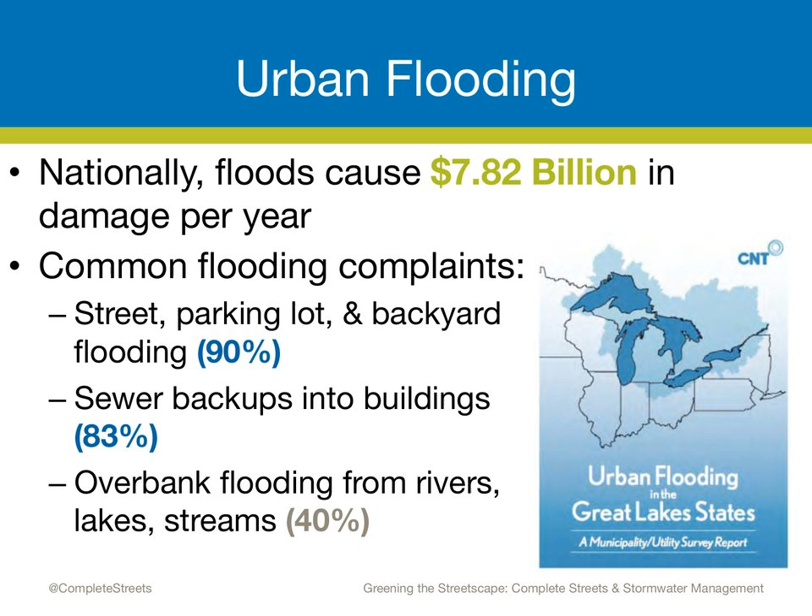What's even more alarming is that this problem is expected to worsen. For those of you that follow transportation, our national transportation funding, and the state of our national infrastructure, we know our infrastructure is aging. It's failing us, and rainfall is increasing as a result of climate change. So without innovative strategies to manage stormwater, we'll see increased damage from flooding in urban areas. And this isn't just damage to property and to our infrastructure. This is damage to life.

A little unknown fact about me is that in a previous job, I worked for a member of the King County Council who also chaired the King County flood control district, and a lot of what we worked on were urban flooding issues. And sadly, during that time, there was actually a woman in the city of Seattle who died due to flooding in her home that was a result of poor stormwater management within the city. And that was outside of the floodplain.

We have another survey from CNT, in Midlothian, Illinois, that found, again, most flood impacts happen outside the floodplain, where insurance coverage for flooding is not as comprehensive. For instance, you don't think of the city of Seattle as a floodplain. Our floodplains are north and south of the city, and yet we did have a lot of flooding. So who bears the weight of this burden? Those who cannot afford to move. Often cities also bear the burden as they are responsible for cleaning up the stormwater. We've had CSO, or combined sewer overflow, issues.

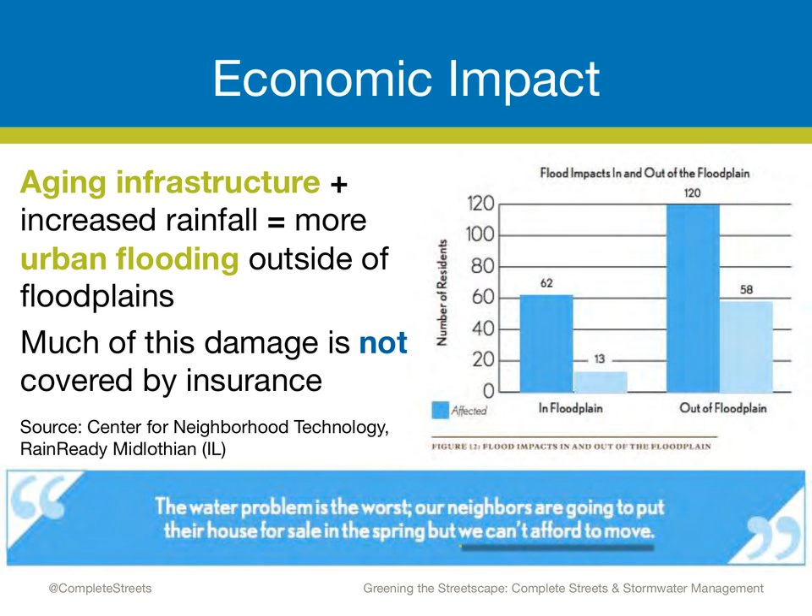So I think it's such a great nexus in hitting all those bottom lines we really look for at the coalition. So with that said, I want to start out by introducing Aaron Villere. Erin is a program associate with NACTO, that's the National Association of City Transportation Officials, and a National Complete Streets Steering Committee member. He is an associate with their Designing Cities initiative.

He works with cities to expand peer learning opportunities and promote best practices in multimodal street design. Erin has worked closely with cities on the development of two of the most recent additions to NACTO's library, the Transit Street Design Guide and what I just mentioned, the Urban Street Stormwater Guide. He has also had the chance to work with cities to advance innovative street designs that create better places for people walking, bicycling, and riding transit through NACTO's Transit Program Accelerator, the Digital Design Charrette Series, and the Cities for

Cycling Roadshow. There's a lot of alliteration in that, Erin. Erin has a master's degree in city planning from Boston University, where he studied the relationship between transit expansion projects and equity. So with that, I'm going to turn it over to Erin.

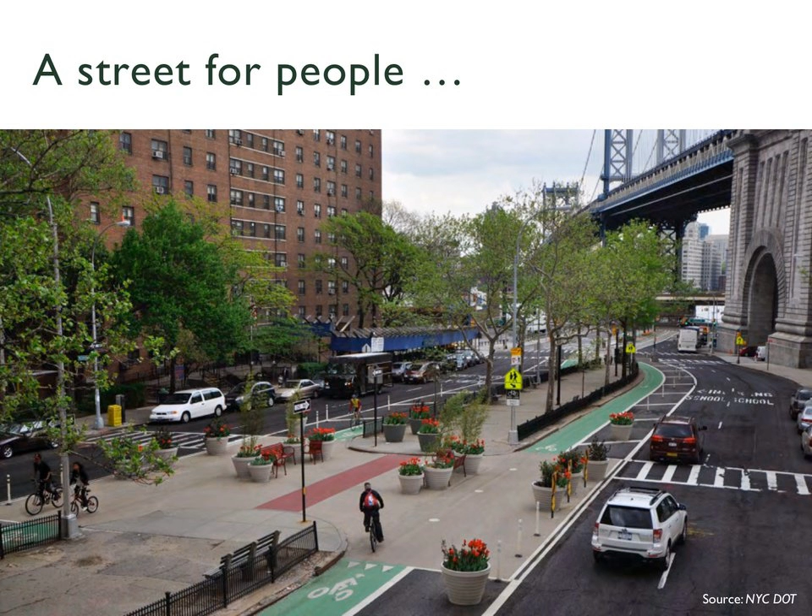However, leading cities have done tremendous work reclaiming and reorganizing these kinds of streets into more complete streets, and they're substantively making these places safer and more inviting for people to walk, bike, and enjoy as public space. However, the piece that's too often left out or thought about sort of in a silo is the environmental quality and ecological quality of large impervious surfaces, which are streets.

And so today we want to shift the conversation to how cities are taking the next step and thinking about ecology and resilience to climate change to get even better performance from one of their most important assets, which are streets. And cities can reallocate space from cars to people to get better mobility, but they can also repurpose impervious surface to protect and restore water resources and systems.

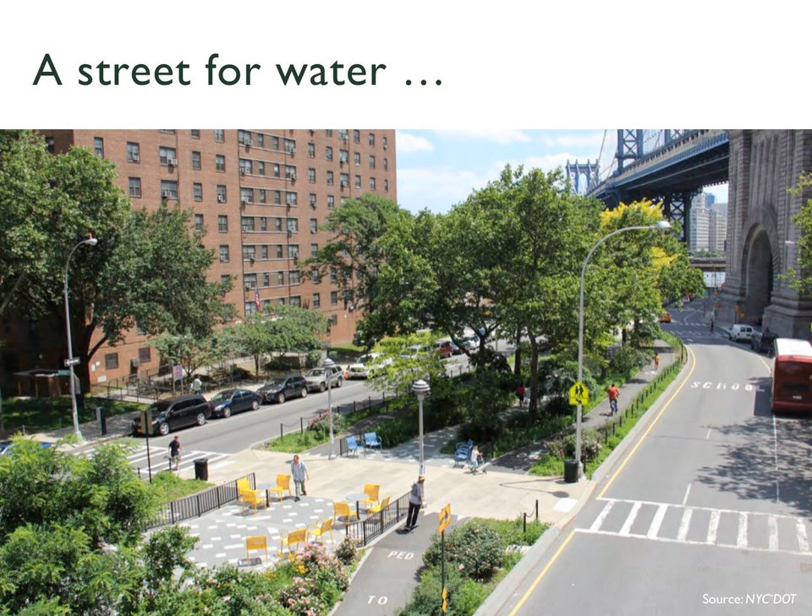And we know that a flooded street is not a complete street. When it rains, people biking and walking and using mobility devices are the first ones to lose access to the street and then the last to regain access. So this is a street that's not doing its job for mobility or for stormwater management.

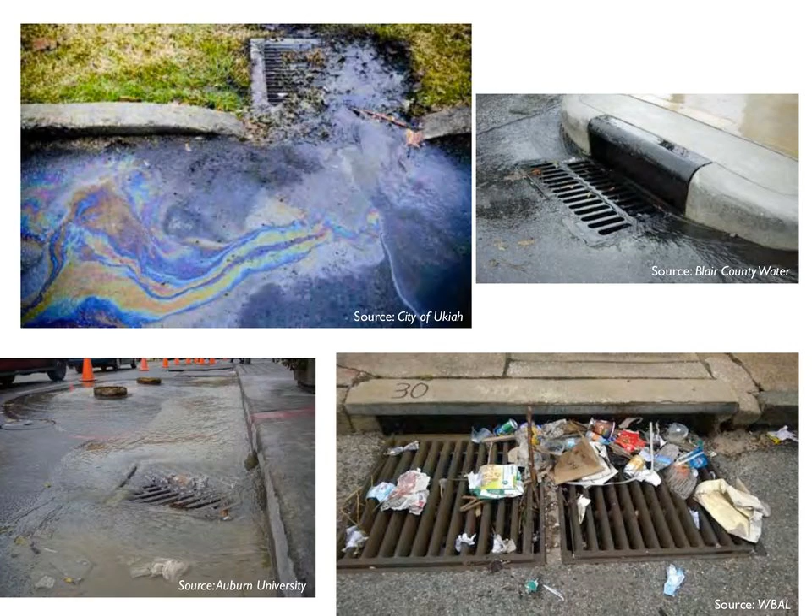And for decades, we've addressed this challenge with infrastructure that's meant to convey the water and drain it off the street quickly, treat it off-site, and eventually dump it into a nearby water body. But what that means is that stormwater runoff collects oils and sediments and debris from city streets, and it brings them to rivers. And this causes a public health risk, it causes environmental degradation, and it's very expensive to treat and maintain.

And if you extrapolate this outwards, anywhere between 60 and 90% of a city might be impervious surface. So when you have that much area, water is unable to recharge in the ground, and it's flowing off city streets and storm drains, and often directly into rivers during overflow events without any water quality treatment.

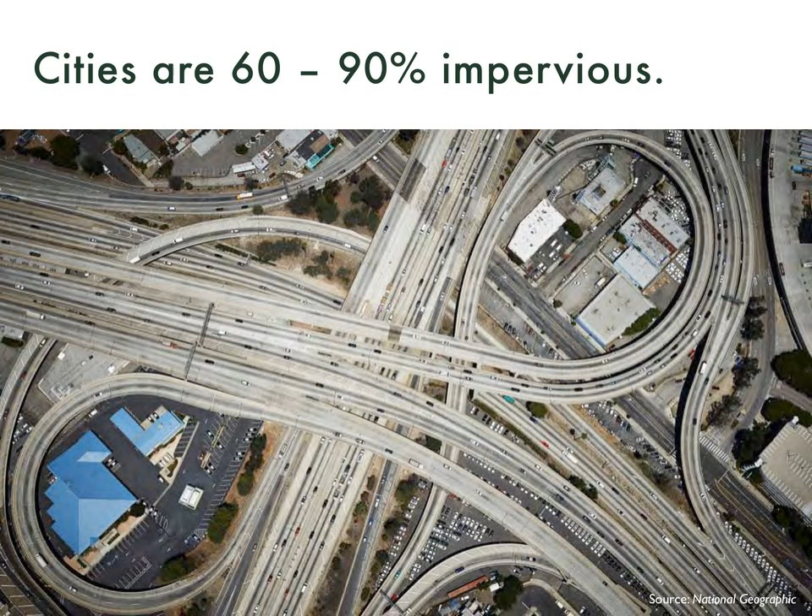At the same time, this also makes streets an opportunity. Of the impervious surface citywide, public rights of way can constitute as much as 40% of the impervious surface, which means that this is potentially publicly controlled right of way and assets that can be thought about differently.

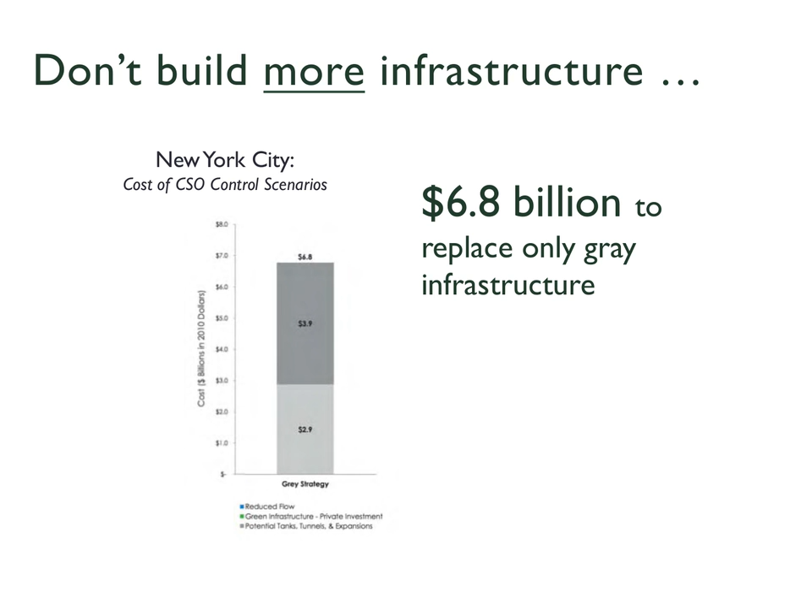And the cost to maintain, build, and replace our gray infrastructure systems is simply too much. This is an example from New York City from PlaNYC. And they found in a 2010 green infrastructure plan that the city was estimating that it would cost nearly $7 billion to meet its consent order for sewer outfalls using just gray infrastructure.

However, by blending gray and green infrastructure strategies, the city stands to save nearly $1.5 billion in public funds over 20 years. And so we see that making better infrastructure investments is essential for any public entity, not just for addressing flooding and public safety, but also for making smart financial decisions.

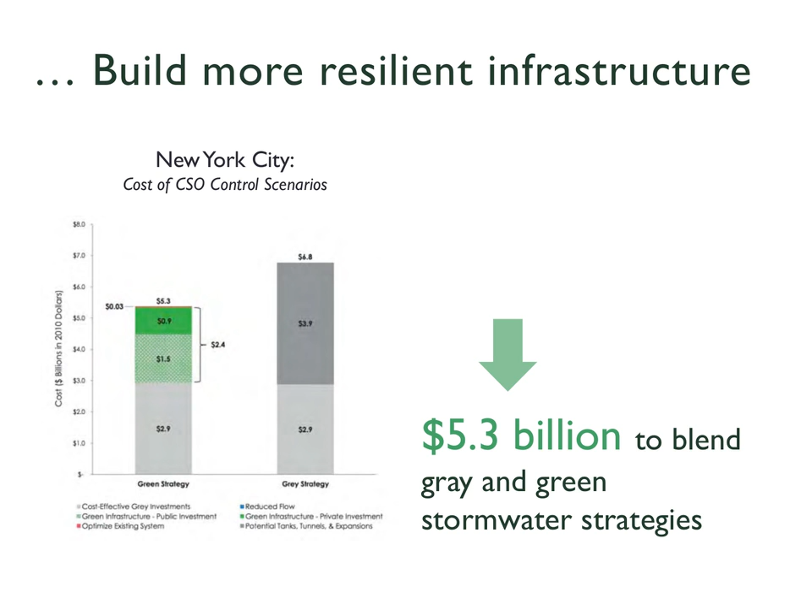So streets are a solution that we can apply to our stormwater problems. Why aren't we acting on this on a large scale yet? And this is typically because urban streets generally fall under the purview of either a city DOT or a public works department or even a planning department in some cities. And that means that managing and coordinating what's between the buildings in the right-of-way can already be complicated.

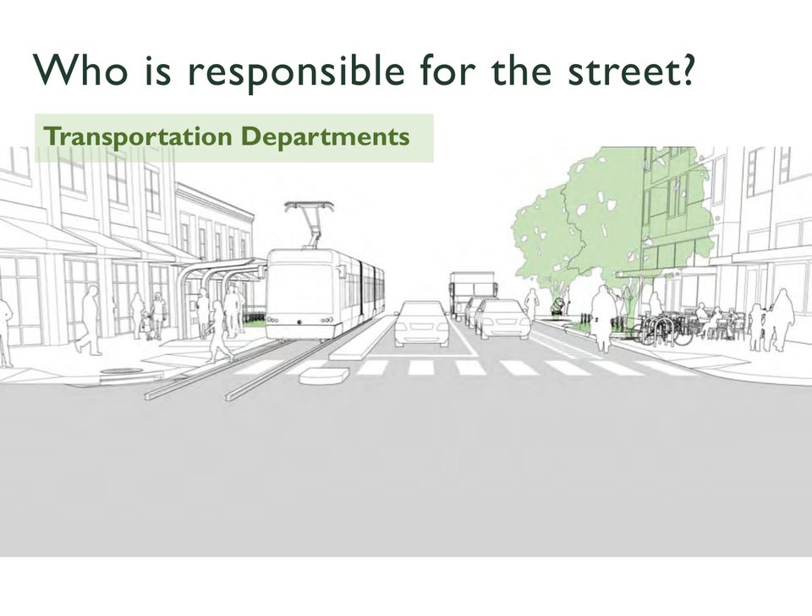But when it comes to managing what's under the street, these are completely separate worlds. A water and sewer agency may manage the subsurface, but there are also private utilities, legacy infrastructure, and in too many cases, what's beneath the street is a complete mystery. So agencies with differing mandates can really struggle to define responsibilities and coordinate on complex and multidisciplinary projects.

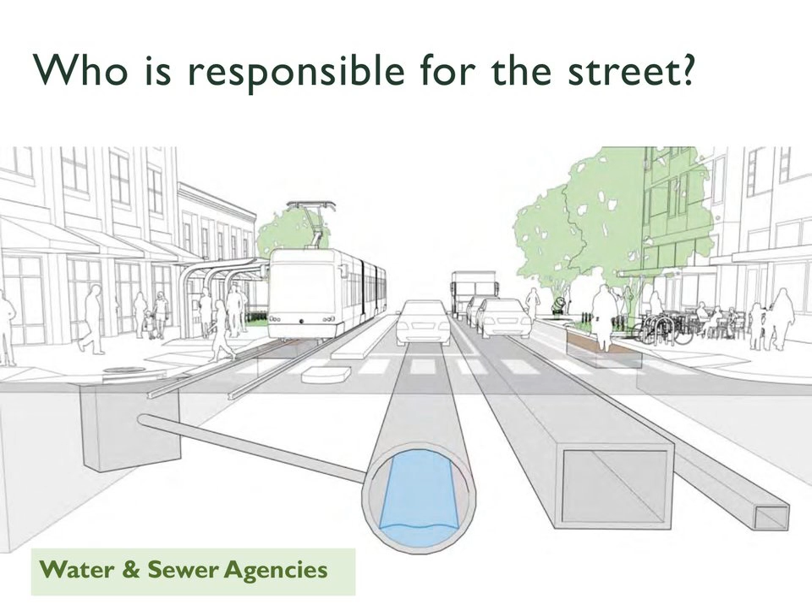As we've witnessed, the conversation changed around who we design our streets for. Cities have developed a lot of understanding and a lot of sophisticated guidance around these new ideas and design principles. And we've seen that with the emergence of really great guidance and a wide adoption of complete streets policies. And at the same time, we've seen a lot of cities develop really far-reaching guidance around developing green stormwater infrastructure, trying to meet their sustainability goals and their policies and their legal requirements.

But what we started to notice, and the reason that this guide came together, was that cities were really trying to bring the two worlds together. And the two cities that you're going to hear from today were actually starting to try to marry these ideas of how do you develop a complete street with how do you develop a sustainable street that helps you meet your goals. And so we want to move from creating a permission slip to innovate, as we have with the past guides, to creating this vocabulary to collaborate.

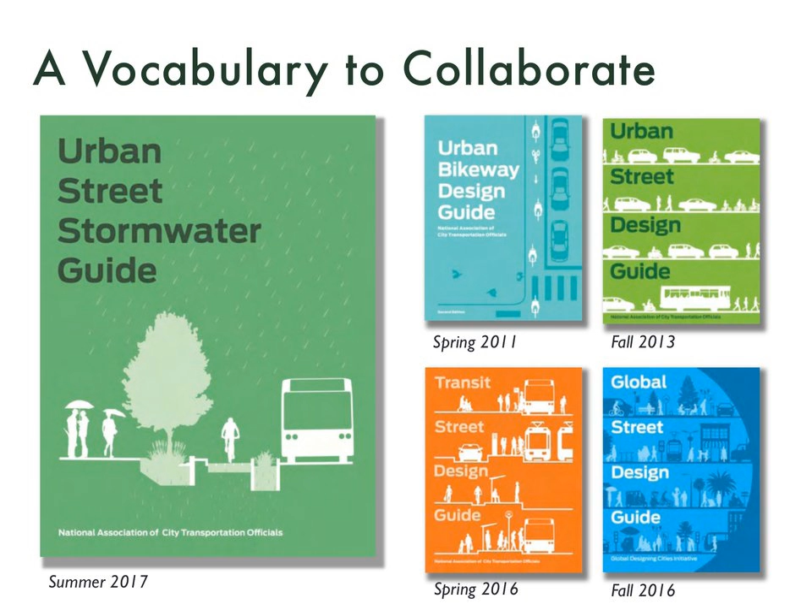We want to be able to bring together the worlds of water and sewer agencies with the world of the DOT or the Public Works Department. Because complete streets necessarily need to be green streets. It needs to synthesize all the best practices of integrating green infrastructure into the right-of-way, but also give planners and street designers a language for understanding what the ecological needs of designing those systems are.

So integrating green infrastructure is not one size fits all. It can be adapted to your city's ecology and challenges, and it can be made to meet your transportation challenges. It can be applied at many scales. It can magnify the impact of many different kinds of projects, and actually unlock new funding sources.

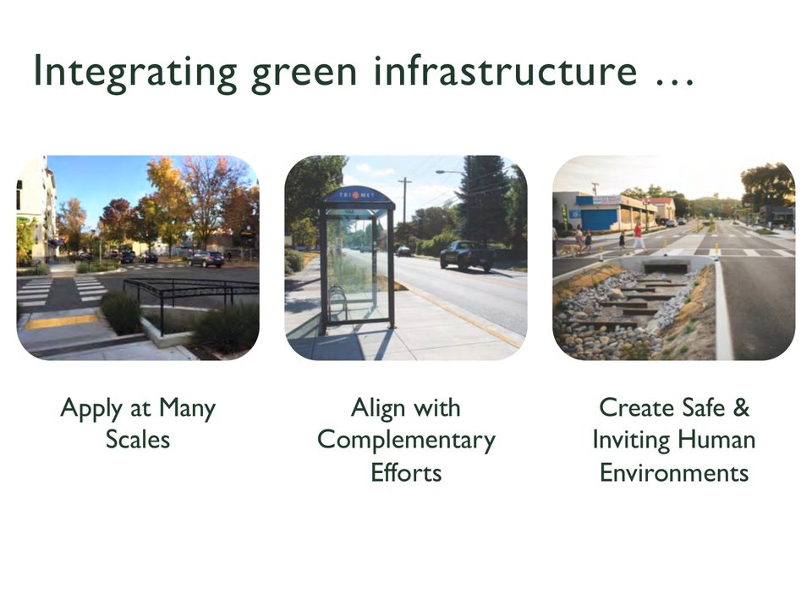And it should be used to fundamentally transform streets and make safer places to walk and bike and more inviting and economically competitive streetscapes. This guide showcases a number of street typologies that illustrate how different streets can be sensitive and integrate green stormwater infrastructure. For instance, many cities have overbuilt downtown streets that they're retrofitting as safer places to bike and walk, as well as trying to improve transit speed and reliability.

But while reconstruction that is focused on mobility outcomes may not involve major changes to the subsurface, green infrastructure can still be integrated to improve the performance of the street, such as these stormwater curb extensions can gather runoff at the corner, and transit stops can integrate green features, which actually has been proven to reduce the perception of wait time for passengers and improves comfort at the stop. And planters and street trees can manage runoff while providing canopy to people biking and walking and make this a more inviting human environment in addition to a high-performing place for movement.

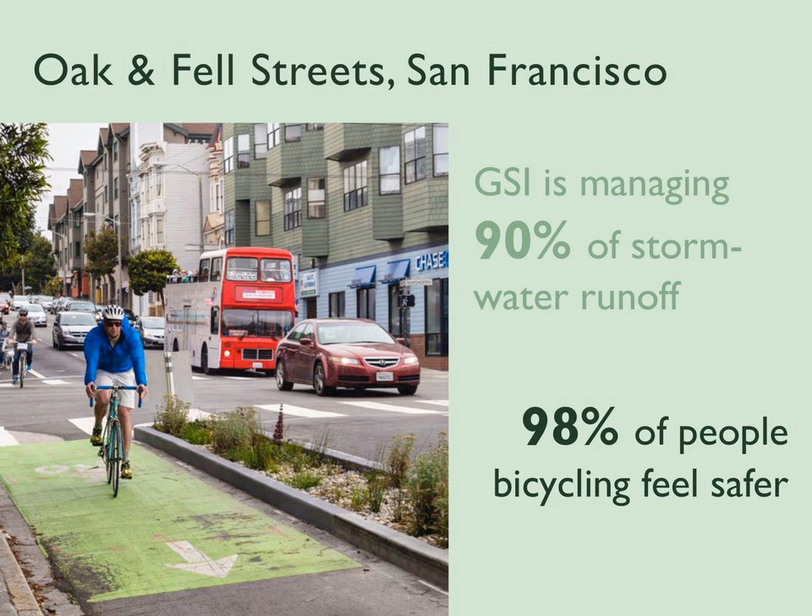And we see this in real case studies. So for instance, this is Oak and Fell Street in San Francisco, where green infrastructure is managing 90% of the runoff on the street while integrating a protected bikeway that 98% of people feel safer riding and report that. This is gathering ridership while creating a better space for water.

It also means seeking opportunities to do more. So you may have major capital projects that completely reconstruct corridors above and below the surface, such as when you introduce high-capacity transit routes. GSI can be incorporated throughout the configuration in many different places and can unlock many opportunities to create new spaces.

And we see that on the Green Line in the Twin Cities, which is already passing its 2030 ridership goals, I believe. It's serving 1 million riders each month. It introduced 1,000 street trees. It's managing half the stormwater runoff on an 11-mile corridor, and it's already spurred $3 billion in commercial and residential development. So this is where you see each of those bottom lines coming together.

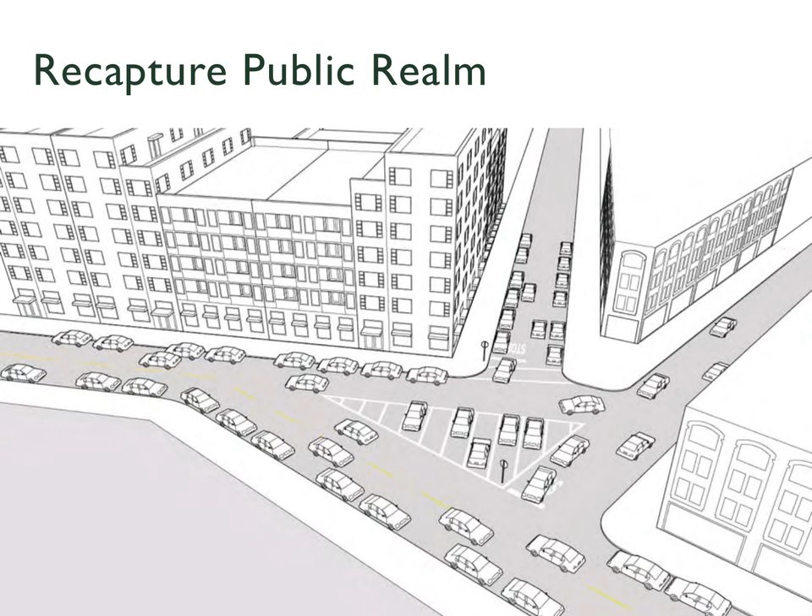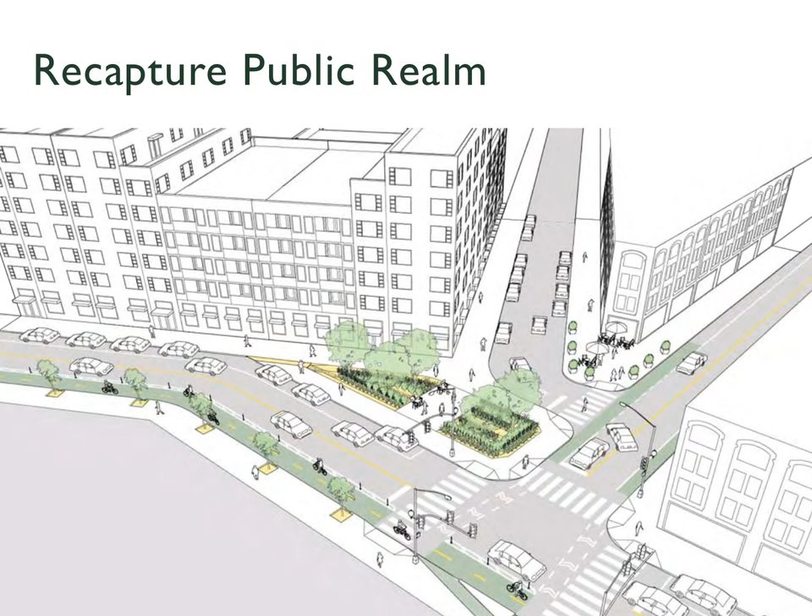Green infrastructure is also really important for recapturing poorly utilized street space, especially at skewed or complex intersections, such as this example where you take a previously hostile car space and turn that into a vibrant and true community asset. The crossings can be normalized and pedestrian circulation can be improved while unlocking a large footprint for bioretention and infiltration. And in areas especially with poor access to green space, recapturing streets as plazas and managing vehicle access is a boon to both the human and the water environment.

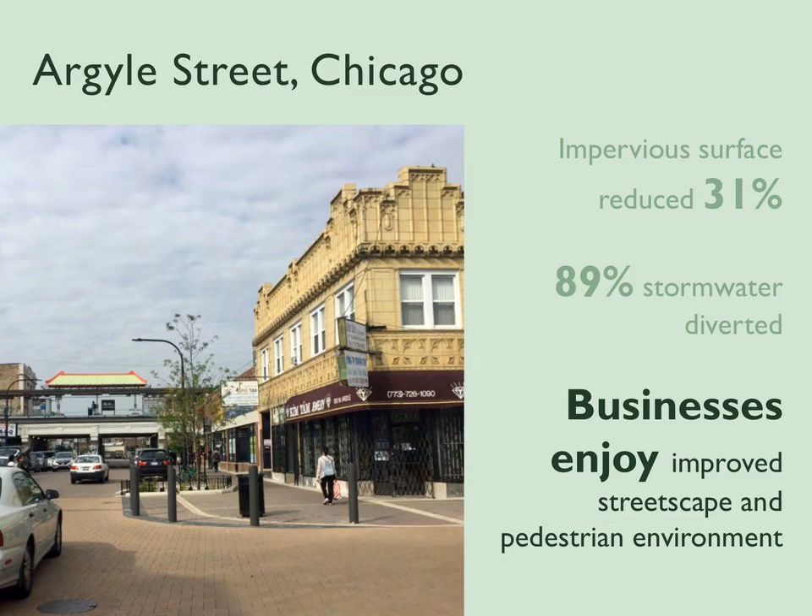And we see these innovative typologies, for instance, on Argyle Street in Chicago, which is the city of Chicago's first shared street, where impervious surface was reduced on a retail corridor 31%. It's diverting 89% of the stormwater, and the businesses are already enjoying improvements to the streetscape and are satisfied with the improved pedestrian environment. So with that, I'm going to pass along to the cities.

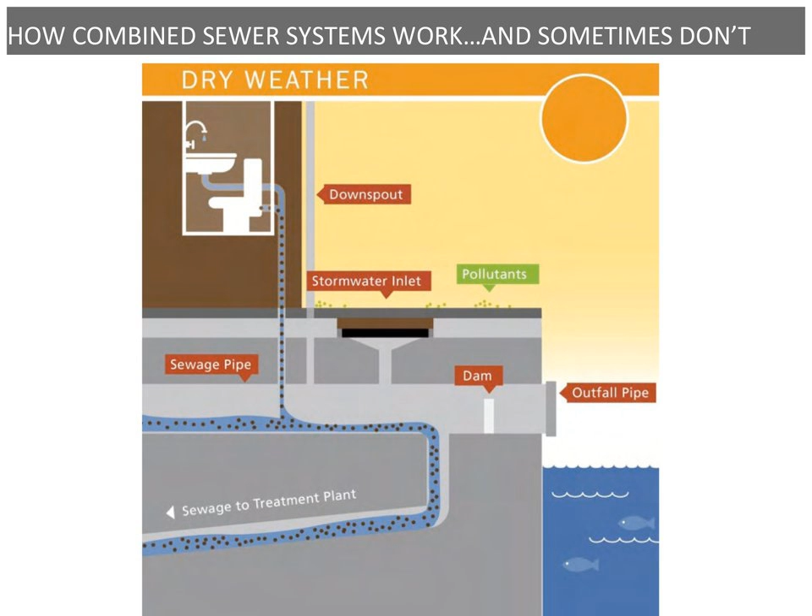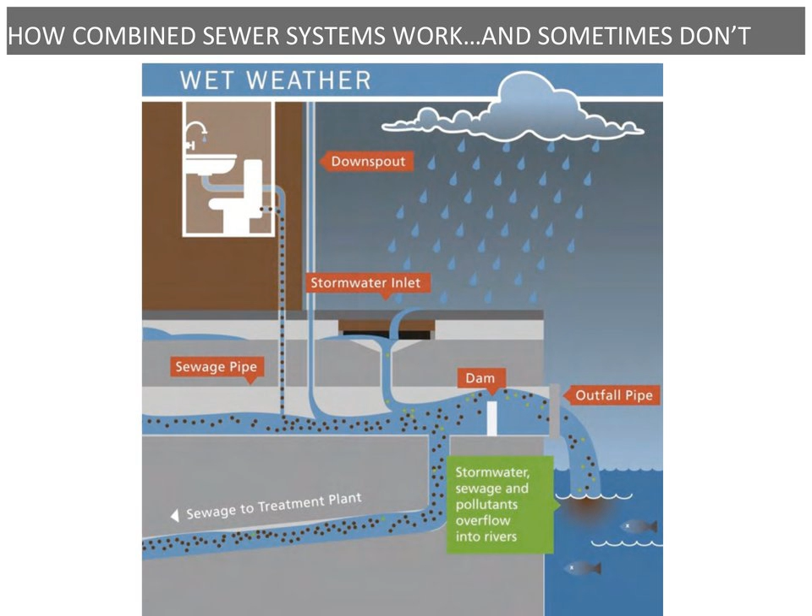Of course, hundreds of years ago it went directly into the river, but now we take it to the wastewater treatment plant. But in cases of very large rainstorms, we do have overflows of rainwater with some sewage diluted in there into our waterways. So this is the primary issue that our city and a lot of other cities are really targeting with stormwater management programs.

And similarly to New York that Erin referenced, we also did a cost estimate and engineering estimate on what it would take to build a gray infrastructure system to manage all of that stormwater and meet our compliance goals for reducing combined sewer overflow pollution. And we came up with a number in the realm of $9 billion to do that type of gray infrastructure solution using tanks and tunnels.

And we also did an analysis of how we could approach that same issue using green infrastructure, and we chose the green infrastructure route, which is $2.4 billion, in 2011 dollars. So it'll increase as currency changes over time. But that was our option, to do actually all green infrastructure, and we're not actually doing much gray infrastructure at all except for some improvements to our wastewater treatment plant.

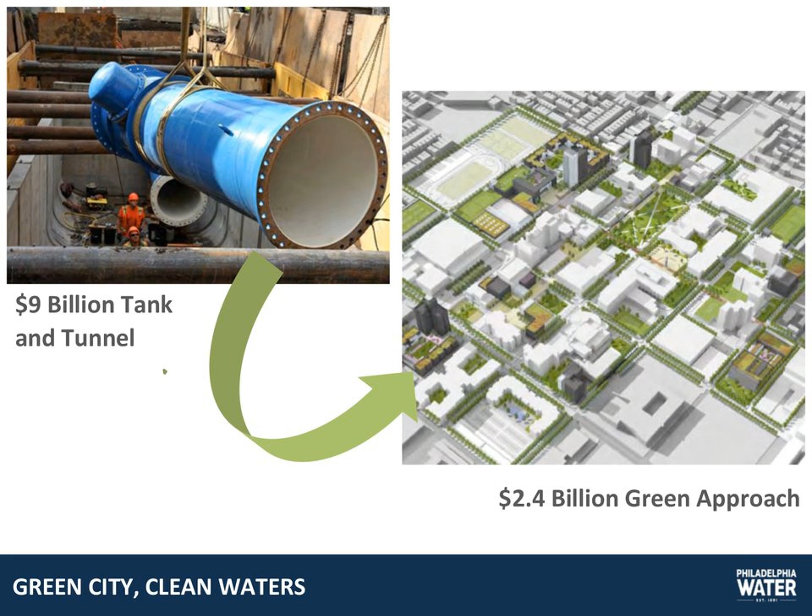So a little bit more on the background of that program. We initially started our plan, technically called the Long-Term Control Plan Update, in 2009, and it was approved in 2011 with a consent order agreement from the Pennsylvania DEP. The DEP enacts the Clean Water Act on behalf of the EPA. So we are under the jurisdiction of the DEP, but also the EPA on top of that.

And our goal is to reduce our citywide combined sewer overflow pollution by 85% over a course of 25 years. We have an estimated $3 billion plus budget at this point over those 25 years, and we have regular deliverables and annual reports that we're providing to the DEP, as well as 5-year targets where we have to basically prove that we're on track to meeting those goals.

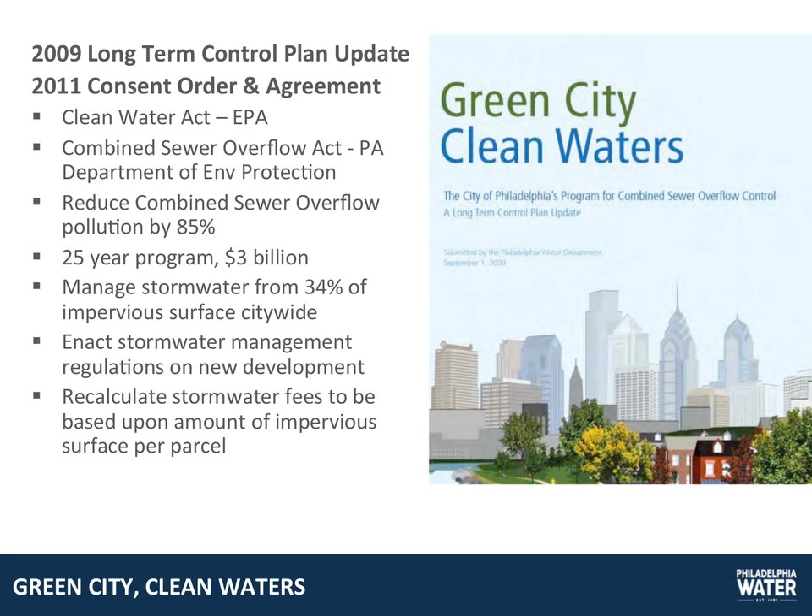We will be managing stormwater from 34% of our impervious surface citywide, and we're doing that through green infrastructure that the city is building, but also through stormwater management regulations. And we have also recalculated our stormwater fees and our bills so that individual property owners are actually paying based on the amount of impervious surface that their property contains.

This is a brief overview of where we're at. Starting in 2011, we hit our 5-year target last year in 2016. So these numbers are about a year old, but they're still pretty significant. We're tracking a lot of different data. So this is our 5-year report that we gave to DEP. These 3 different types of projects are just to give a view of what types of programs we're working on. The 137 project packages, those are green infrastructure projects that the city, meaning the water department for the most part, is actually constructing.

And that's where we'll be getting into green streets specifically, but we also have a lot of green infrastructure we're building on parks, on vacant lots, and other facility sites. The next bar are our regulated projects, and those are all of the private development projects that have come through the regulatory process. We actually had a little bit of a head start there because our regulations were initiated in 2007. So we have a large number that we reported in those first 5 years, since they actually were going from 2007 to about 2016.

And then our grant-funded projects are grants that we provide to private property owners that they can use to do their own stormwater retrofits, and then they will also receive a reduction in their stormwater fees on their bills. So in our first 5 years, we were able to manage 837 acres of impervious surface. In our 25-year program, our goal, and basically our compliance target that we've agreed upon with the DEP and the EPA, is to manage 10,000 acres of impervious surface. So as you can see, our targets are going to increase in a very high curve after the first 5 years. We're really ramping up in a big way.

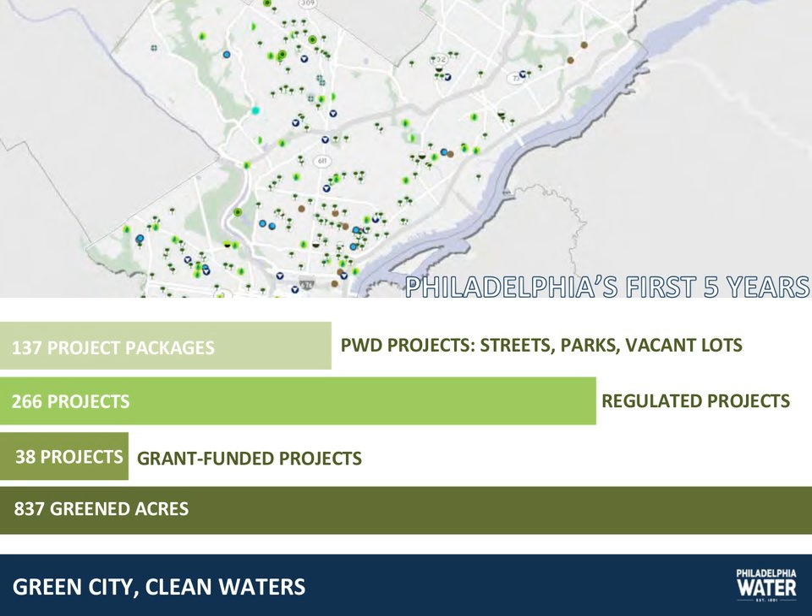So I'm going to talk a little bit specifically just about those green street projects that we mentioned earlier. A large majority of our green infrastructure projects at this time are green street projects. And of course, on one hand, we have a good illustration here of just the large amount of impervious surface that is represented by our streets. But also, since we are the water department, we have jurisdiction to work within the public right-of-way. So it was really the simplest location for us to start implementing green infrastructure.

We do, of course, work with our streets department and go through a design review process, but we do have at least the ability to work in the street without necessarily developing an agreement or requesting permission from another city agency. And even our rain gardens and green infrastructure systems that we are developing on parks and on vacant lots and on facilities often actually are managing the stormwater from the streets, because the city streets are really our largest target of impervious surface to manage.

So a little bit about our green infrastructure partnership. We have a Green Streets Committee that's been underway for about 5 years now. And that's where we are working together with the Streets Department, with the Commerce Department that does our commercial corridors, with SEPTA that has a number of transit routes throughout our city streets, with the Mayor's Office of Transportation that focuses a little bit more on pedestrian and bicycle amenities, as well as overall transportation planning, and with our Planning Commission. And we're working with all of these different agencies to not only get approvals on the green infrastructure, green streets that we initiate, but also to jump into any sort of street improvement projects or street reconstruction or transportation improvement projects that other agencies might be leading.

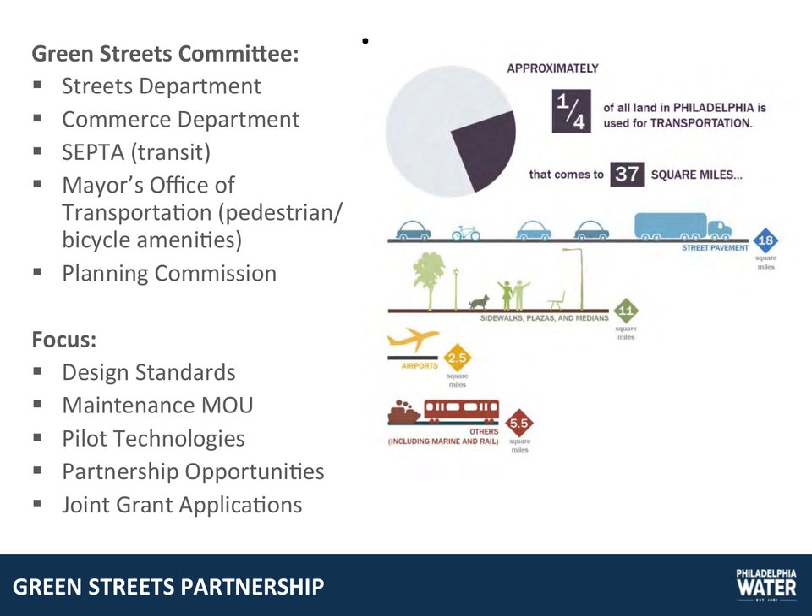Other focuses of those committee meetings and also just the day-to-day communications and coordination that go on there are design standards and maintenance. PWD, we do maintain all of our green street projects and all of our green infrastructure that we construct. So we have a maintenance MOU with the Streets Department that details that process. We are often coming to the Streets Department with some new technologies, like green gutters, something that we're really interested in these days. Doing green separated bikeways is also something that we've been looking at. And then really trying to just align with these other agencies so that when there is a capital project going on, we can incorporate green infrastructure there. Or when there are federal funds available, we can go for grant applications together.

We have not updated it since 2014, but we'll probably do so at some point in the near future just to keep it current for our own uses. And I have one slide that shows a little bit of the types of design standards that are contained within the manual.

All of our green stormwater infrastructure systems are actually connected back into our sewer system. So we have a pretty highly engineered sort of process for each green street or green infrastructure project. So these details that we have in the manual are kind of templates that are like a starting point, and then they have to be customized to the specific location and the specific elevations and topography of that site.

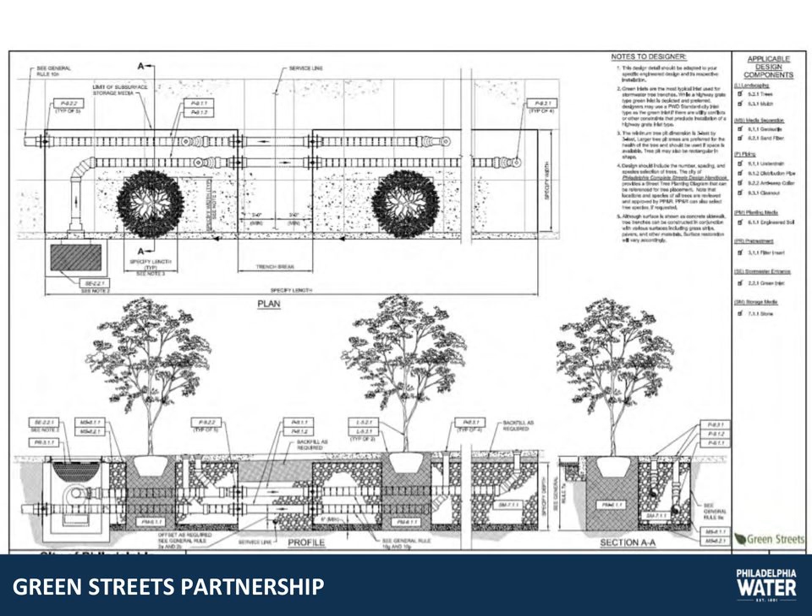The largest number of green street projects that we have are tree trenches, which I'll talk a little bit about more in the next slide. And they essentially look like a sidewalk and trees on the surface and then have a stormwater detention system below. In cases where we have enough space in the sidewalk, we do stormwater planters because that gives us a little bit more space to actually do infiltration and greening and evapotranspiration with plantings.

In spaces where we don't have parking constrictions, we like to do bump outs, or if there's places that have been targeted by the Streets Department or by the Office of Transportation for pedestrian access improvement, we're always happy to do bump outs if the topography and the utilities allow.

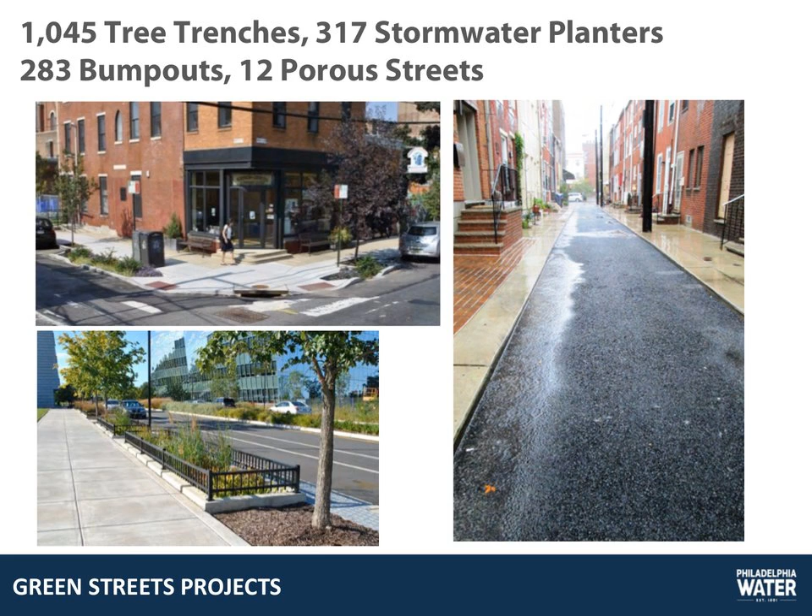So here's a little just informative graphic of how our tree trenches work. Essentially, we are looking to manage as much stormwater from a street as we can. So we identify locations for our green street projects by looking at the topography and measuring how much drainage area drains to a specific corner.

We kind of go block by block throughout the city, and typically if our drainage area is 5,000 square feet or more, we identify that as an economically prudent investment for the department to implement a green street system there.

So like I said, these tree trenches often don't look like much more than a sidewalk and trees on the surface, although we have begun to install some medallions that show sort of like water department, green street infrastructure here, just to raise people's awareness a little bit.

The soil profile actually does some filtration of pollutants out of the water, and then it is detained in a subsurface stone bed and allowed to infiltrate back into the soil. We do some soil preparation as well, and these systems are usually at least 5 or 6 feet deep into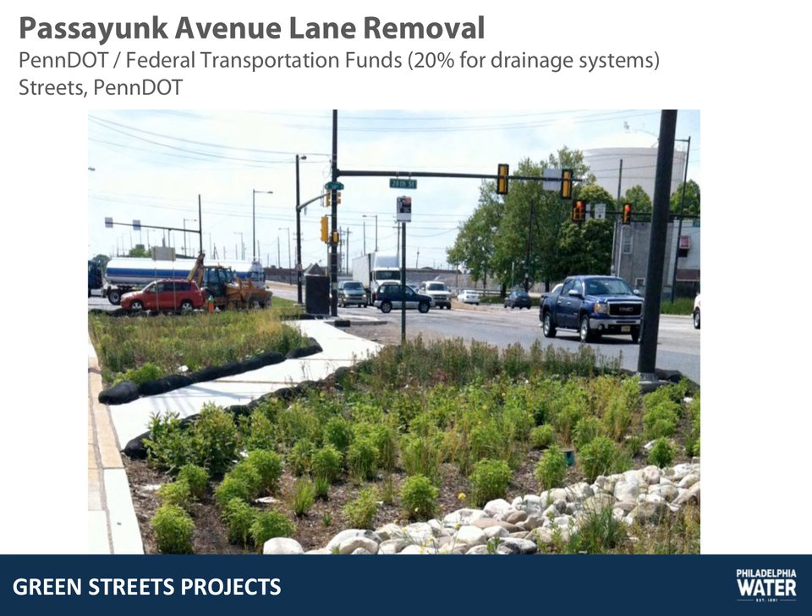So it was a partnership in which they did us a favor to a degree, and we've worked with SEPTA now on a number of other partnership projects where they were really able to get a double benefit out of the green infrastructure system that they installed, and also have a really nice beautification benefit there as well.

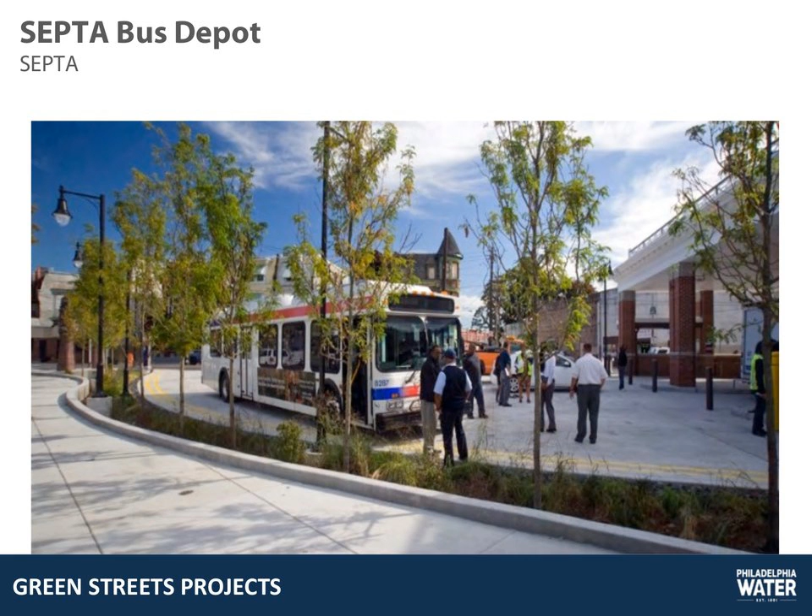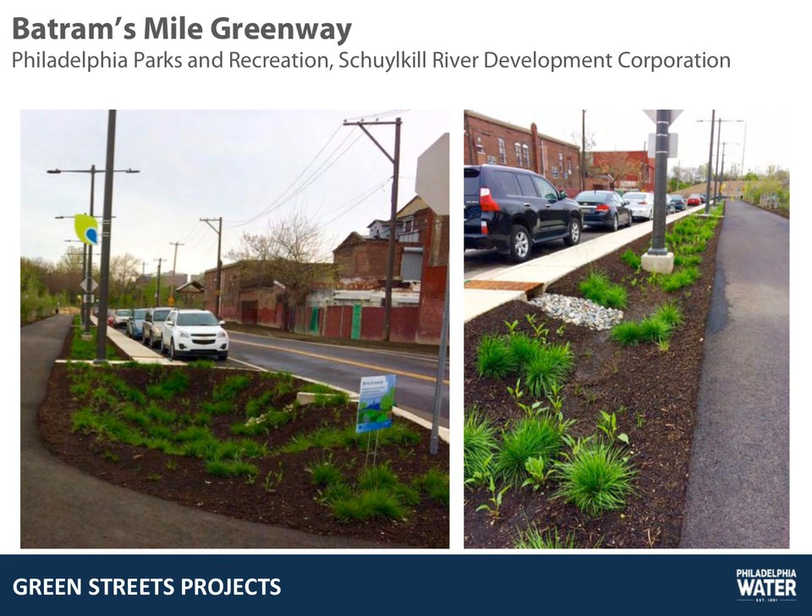I just included our Green Street, which once the greenway comes off of the waterfront to go around some other properties, it comes onto the city's streets, and we were able to provide funding to the Parks and Recreation Department as well as the Schuylkill River Development Corporation to construct these green streets to manage about 2.5 acres of impervious surface from the adjacent streets, and then the Water Department takes on those systems, owns and maintains them going forward.

This project, the Safe Routes to School, was another example of being able to leverage some funding that the school district had originally received as a congressional earmark, $1 million towards improving pedestrian access to schools. And then the Streets Department brought it to us to see if we could actually add to those funds. So we were able to look into what schools could benefit from pedestrian improvements in areas that also had stormwater

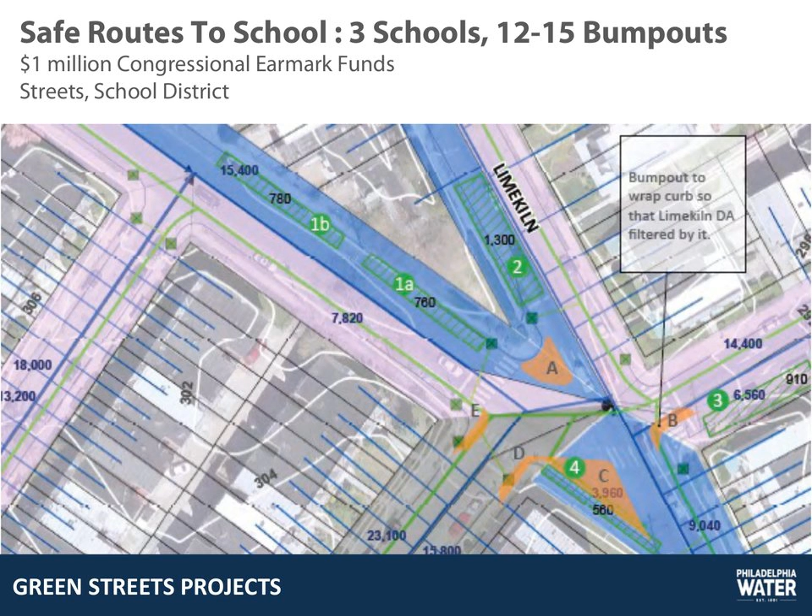So we're looking at, usually in GIS, which direction does the rainwater flow, what is the drainage area that's flowing to each of the inlets, and then in this case, we've taken the intersection and worked with the Streets Department to add in some curb alignment changes for those bump outs in areas that also will allow for green infrastructure development. This is a project that's still in design.

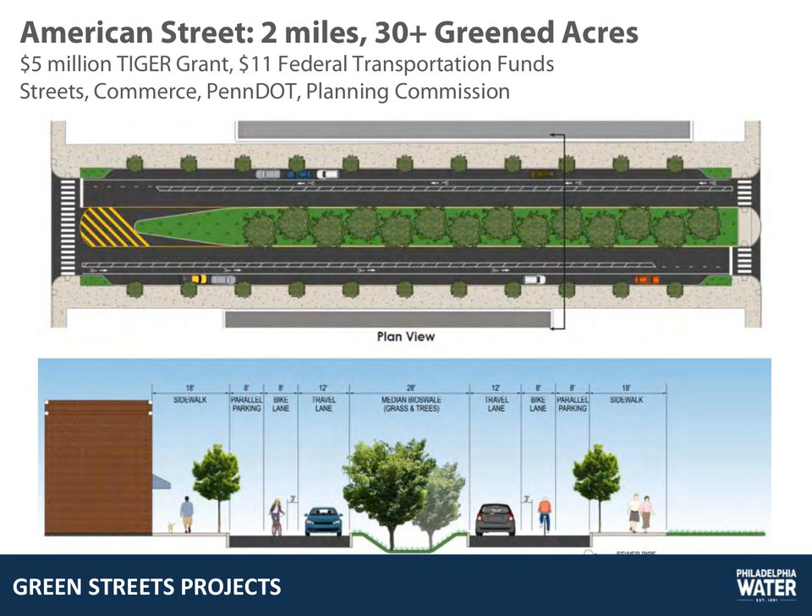So we are constructing or providing funds to construct this large bioswale that spans 2 miles and will manage over 30 greened acres. That's a project that is going to construction, I believe, next year in early to mid-2018, and it's definitely our largest partnership coordinated project yet, but we're pretty excited about it.

And in conclusion, our next things on the horizon that we are looking for are in our Green Streets program. We have started to work with the Mayor's Office of Transportation on how to figure out how we can do stormwater management as part of their separated bike lane initiative. And we also have a pilot program underway where we are hoping to be able to provide grant funds to developers to build green streets, because we have a lot of developments that come through.

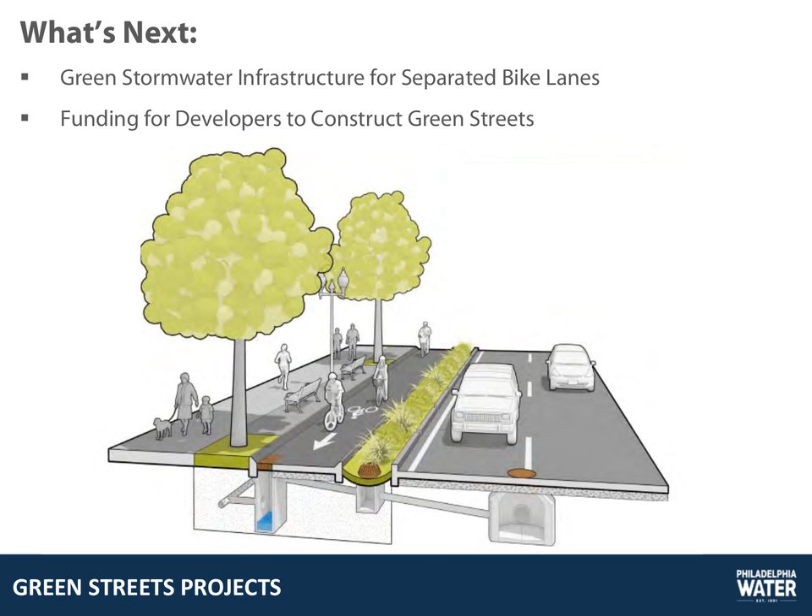Of course, they're building new sidewalks, new trees. We have a really high rate of development at the moment, but we miss out on that opportunity to also make the tree and sidewalk installation an actual green stormwater management system, which we'd really like to do. So we have a couple pilot projects underway, and if we can get those approved, then hopefully we'll have a program to actually fund privately developed green streets that are then turned over to the water department for ownership and maintenance.

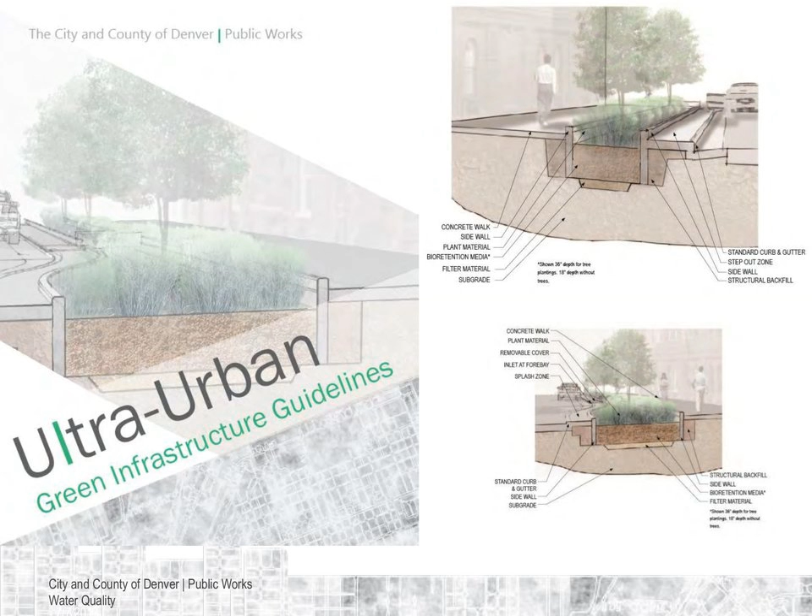Denver needed this new criteria for a number of reasons. First, Denver has about 16% impervious cover within the right-of-way. And while streets represent one of our largest sources of stormwater runoff and stormwater pollution, as we all know, they also represent one of the greatest opportunities for green infrastructure.

Secondly, Denver has a pilot program underway with the Colorado Department of Public Health and Environment. And this is the agency who oversees and manages our MS4 permit. Part of the pilot includes a variance program for linear transportation projects. The variance program states that linear transportation projects must employ stormwater best management practices to the maximum extent practical on their site. But once those options are exhausted, the project can then purchase or buy the remaining water quality capture volume that the project needs from a regional facility.

But part of the problem with this scenario and the maximum extent practical is that Denver didn't have any water quality best management practices suitable for these linear transportation projects to use. The criteria we had was Urban Drainage and Flood Control District's Volume 3 and Denver's Storm Drainage Criteria Manual. And both of those documents are better at detailing BMPs that are more suitable for larger development sites. So essentially, linear transportation projects were mainly buying water quality and not providing much treatment, if any, on site, which is really a problem when you're trying to improve water quality.

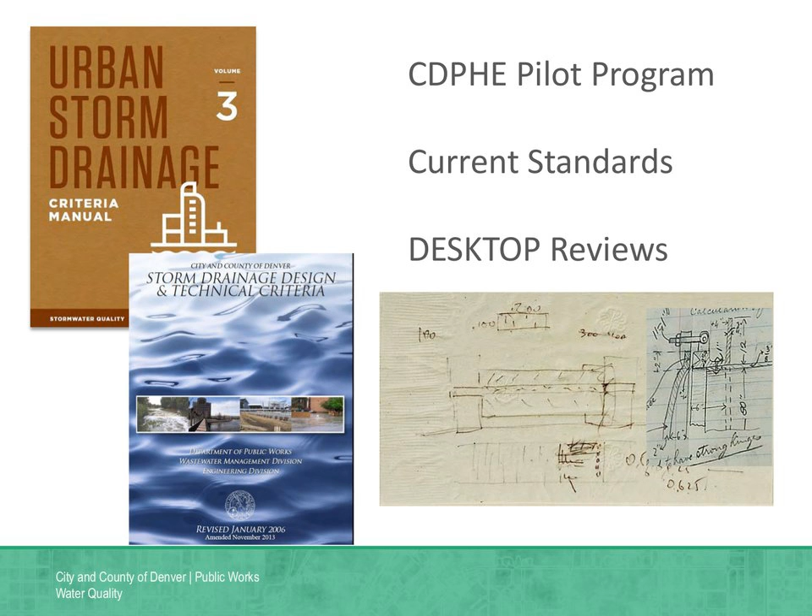And lastly, because Denver didn't have any adopted criteria for these ultra-urban denser sites, there was a great deal of individual desktop review and decisions and solutions drawn on the back of napkins. This made it pretty difficult for both our public and private projects to get through the review process. So we clearly had a need, but now what do we do?

So it was time to assemble the team that would work to develop this new criteria. The effort was led by Public Works, by our group, which is Policy Planning and Sustainability. We also pulled in people from the wastewater design team, from wastewater operations and maintenance, from our transportation and mobility department, and street maintenance. We also had our ERA team at the table who reviews city projects for compliance. We had representatives from the Department of Environmental Health. They are responsible for monitoring our surface water bodies. We also had development services at the table who review private development.

We had staff from community planning and development who are really responsible for large citywide planning initiatives and neighborhood planning initiatives. And of course, Denver Parks and Recreation was at the table and a major partner for us. And lastly, we had Urban Drainage and Flood Control District as a partner. And I would say that they were probably our most valuable and important partner, not only because they paid for half of the guide, but because they're really considered both locally and at a national level to be experts on stormwater management. So they brought a level of expertise along with it, that without their leadership on the project, my guess is the effort might have stalled and taken even longer than the 2 years.

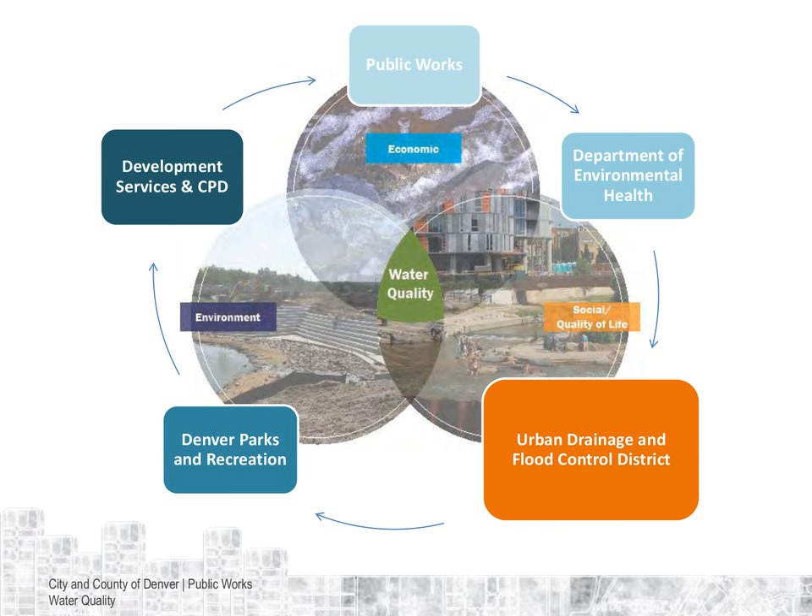So two of the biggest hurdles we encountered in developing the guide were centered around safety and maintenance. As far as safety, for some reason there was this idea that people would fall into these planters and never be able to get out. So we devoted a lot of time to defining things like step-out zones, which in our case for the guide, when there is no parking, the step-out zone is 1.5 feet, and with parking it's 2.5 feet.

We spent a great deal of time on planter wall height and came to the compromise that the wall height would be 6 inches high on the long side of the planter that's parallel to the street, and 15 inches on the short side perpendicular to the street, which I think some of us in the field feel is a little aggressive, but it's certainly a starting point.

We talked a lot about the depths of the planters, again, with this fear that people would fall into them. We came up with an 18-inch minimum, which is what we need to get the water quality capture volume. We also have a 4-foot minimum for the access walks in between the planters, and the planters can only be 40 feet long. We also had a great deal of conversation centered around maintenance, as everyone who works in this field knows those conversations, and it was a huge concern.

So we built in a number of design criteria, including the inlet sizing, pre-treatment measures with forebays and filters, and planting schemes that we really hoped would help ease maintenance responsibilities. And as far as maintenance responsibilities are concerned, Denver has kind of a unique approach in that public works is responsible for the hard infrastructure. So that's anything such as the planter walls, the flow line, the gray infrastructure, the storm pipe within the BMP, and a BID, a business improvement district or maintenance improvement district, is responsible for the soft infrastructure. The soft infrastructure refers to the vegetation, trash removal, and irrigation.

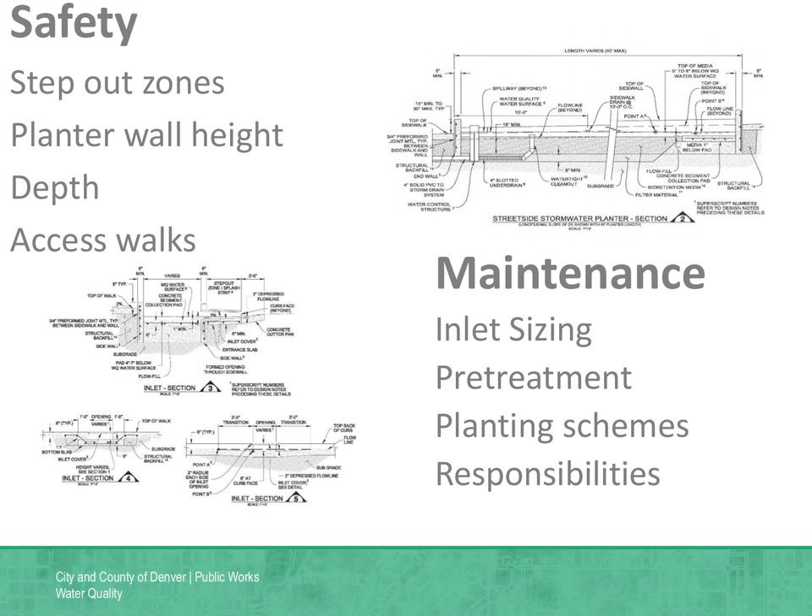But we didn't want to preclude neighborhoods without a business improvement district or create any sort of equity issues. So in neighborhoods without a BID or MID who can't afford one, we do have an outside maintenance contract set up for those communities so that they can also enjoy the benefits of green infrastructure. So while we don't have quite as robust a program as Philly, which is very impressive, I am proud to say we finally have a number of projects underway that are using the ultra-urban green infrastructure guidelines. And I'm going to highlight two of those.

Our first one is Brighton Boulevard, and Brighton Boulevard will be Denver's first true green corridor. In the first phase, they'll install about 40 street-side stormwater planters, which will provide about 50% of the treatment of the roadway. That 50% was all we could get to due to some limited right-of-way. But the second phase will get 100% water quality capture volume, which is pretty exciting. The project will also include protected bike lanes and new sidewalks and really create a safer, more walkable and bikeable community.

The second project I'm going to talk about is 21st and Broadway, and this represents a really unique collaboration with the Transportation and Mobility Team. This intersection at Broadway is considered a pretty dangerous crossing for all modes, all users, for bikes, peds, and autos. So the Transportation and Mobility Team is closing a section of that street, making a more direct connection across Broadway and installing a bike light. So we worked together to also include a number of the best management practices outlined in the ultra-urban green infrastructure guidelines, including a tree trench, a stormwater planter, a green alley component, and my favorite piece of it is we're using a green gutter to separate the bikes from the peds. So what we really hope, through some project metrics that we'll track, is that we can showcase how green infrastructure can be used to make safer connections.